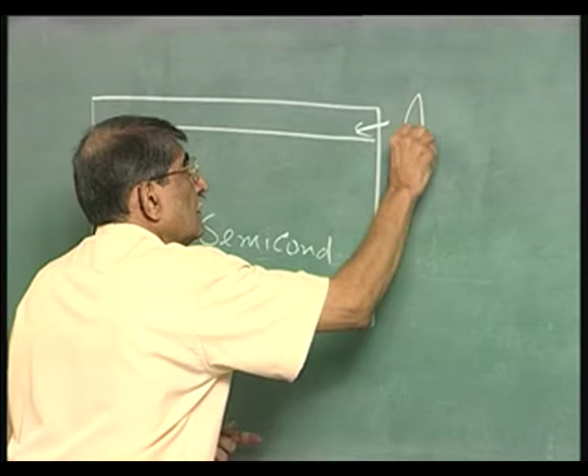Whether you talk of MOSFET, JFET, or bipolar transistor, the active layer is very thin. The rest of the layer, what does it do? It provides only mechanical support.

Now, in the process of providing mechanical support to that active layer, it does a lot of harmful things. The harmful things are some capacitances which come from the device to the substrate, and also the capacitance when you interconnect the devices, the routing capacitance, whatever you want to call it, with respect to the substrate, that also comes up.

So that is why, when you want to go to high speed, you want to cut down all capacitances. We have seen this right at the beginning. How do you cut down the capacitance? Replace this entire bottom layer by an insulating layer, so that the junction capacitance etc. can be reduced. We will see how it happens.

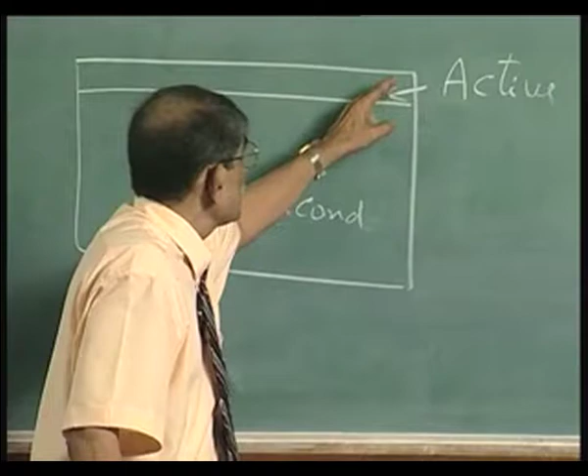Also, when you have a thick insulating layer, with an interconnecting wire going from one device to another, the capacitance of the layer with respect to the substrate can be reduced, because it can be made thick.

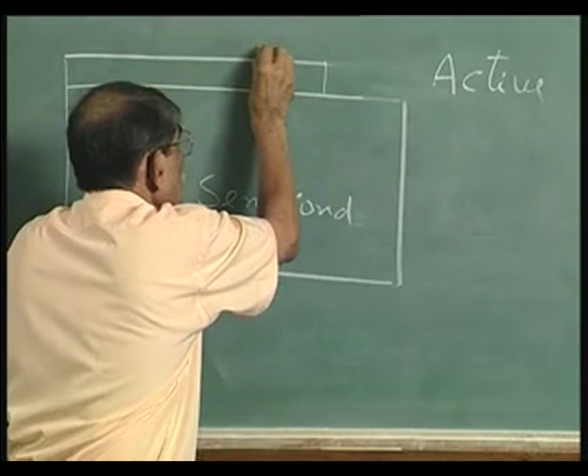For example, with respect to that, up to this point, if I remove this layer for the interconnecting layer, the interconnection goes through like this, that is the capacitance. With a thick layer, the capacitance is very small.

So this is one of the key things in high speed devices and high speed circuits made out of high speed devices. This is why people are looking more and more into substrates which are insulating. In the case of MOSFET, way back 20 years ago, people spent their energy on silicon.

Silicon on sapphire, for example. I think it is denoted as S, O, S. Sapphire is Al2O3, it is an insulator, a very costly material. But still, if you want high speed, this is what they have done in silicon technology, because high speed is not the proprietary domain of compound semiconductors. In silicon itself, people have been trying this: you have sapphire, and on that you grow silicon.

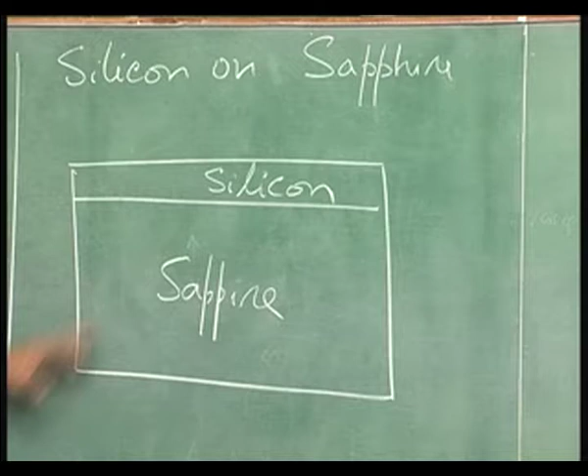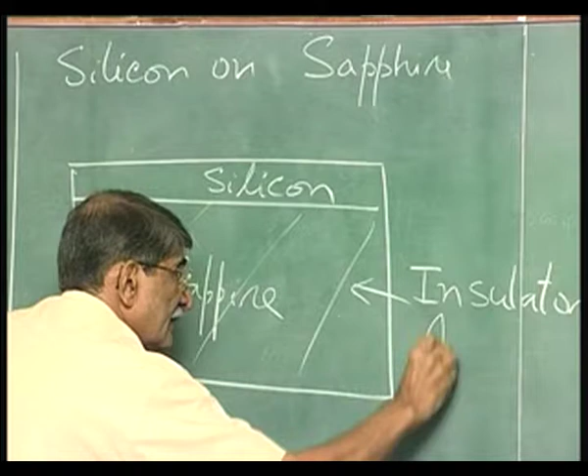This entire thing is an insulator, because it is Al2O3, an oxide. In fact, for defense applications, when high speeds are required, they were using that. Today also, for some very secret defense applications requiring high speed, they use this. But for other commercial mainstream ICs, they do not use it, because it turns out to be very expensive.

Instead, what they have done is not provide the whole thing as insulator. Within your technology, silicon can be put on an insulator, which is put on the silicon substrate. That is called SOI, silicon on insulator. We may have occasion to come back to that later, but today, since we are dealing with this, I just brought it out.

The substrate is insulator, because that is the mechanical support, and this is single crystal. On single crystal, you can grow single crystal. That is a nice thing. That is why you are looking for materials which are of high resistivity, or if possible insulator, which are single crystal. And not only that, the materials must allow you to grow the layer without any defects, meaning the layer you grow must have the same crystal orientation structure as this. Now, these are two different materials altogether.

Still, silicon matches lattice with sapphire when the sapphire has a particular orientation. So that is why they were able to manage, but still they were getting a lot of defects here. So thin layers were rather difficult, still they were able to manage, and get good performance.

You can get a 4-inch wafer. In fact, the person handling it - I have seen people handle it - they are so nervous because it is so expensive. You do not want to drop it, and you say 'I do not want to drop it,' and you will drop it. So, this is the key thing about that.

If you are prepared to spend that much money, and if you are not able to get as good performance as you look forward to, you can also switch to another material like gallium arsenide. With gallium arsenide, you can get a semi-insulating substrate. That is where we are telling - in gallium arsenide, the answer is you have a semi-insulating gallium arsenide. If you are making indium phosphide, a semi-insulating material, indium phosphide.

If you are using gallium nitride, you must look for an insulating substrate, maybe silicon carbide - you look for high resistivity materials like that. So, since we are focusing on this right now, let us focus on this material itself.

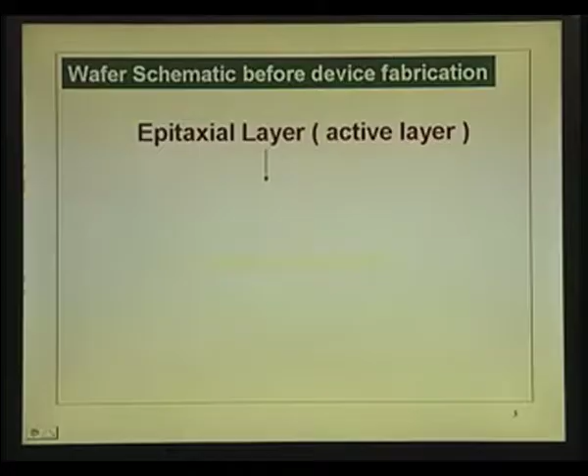So first you must be able to get this semi-insulating gallium arsenide material. Then you can think of putting the top layer on that, and this can be single crystal gallium arsenide, 100 oriented. On top of that you can grow nicely that particular layer, which builds up as time passes.

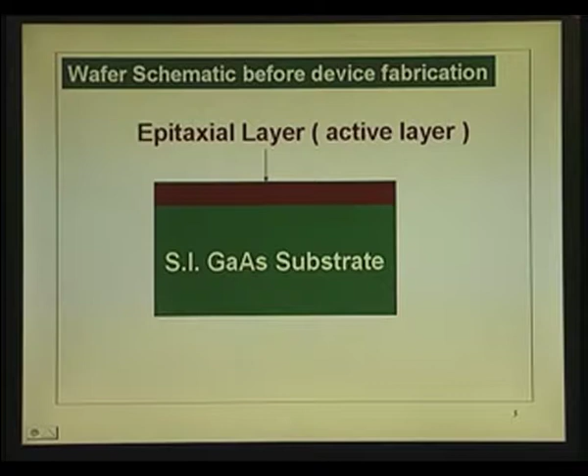That is epitaxial layer. Epitaxy means arranged upon. You arrange the atoms on top of a substrate, and the arrangement takes place exactly the same way as the arrangement of atoms in the substrate.

Now let us go into further details. First we will get into how to make this semi-insulating gallium arsenide. There are two approaches: one approach is chromium doped gallium arsenide. The other approach is in-situ compounded and EL2 doped gallium arsenide. EL2 is another impurity that comes in - you are not introducing it, it comes in when you grow.

What is the problem here? Why should you have chromium doped gallium arsenide? Can't you grow insulating gallium arsenide, undoped, with carrier concentration of 10 to the power 6, which is very, very high resistivity? Can't you get that? You can never get it, because there will be impurities present.

One of the major impurities present in gallium arsenide, which people were facing, was silicon. Silicon itself was coming from the crucible. And silicon, in gallium arsenide, is an n-type dopant. So when you grow by Czochralski technique, usually when you grow from a melt prepared from a polycrystalline gallium arsenide - first you prepare a polycrystalline material, then use it as a melt and pull the crystal - that turns out to be n-type because of the silicon. And you will say undoped gallium arsenide has carrier concentration of 10 to the power 15.

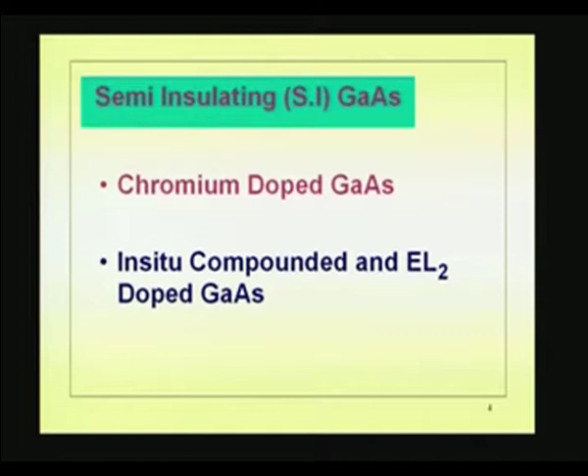Now, what is the thing? So what we said is, to get there, one route is chrome doped, or chromium doped, both are same.

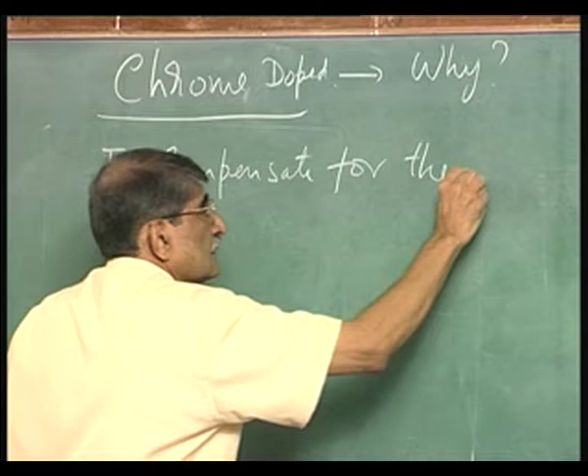This introduces a level to compensate for the shallow donors. Obviously, chromium introduces an acceptor level.

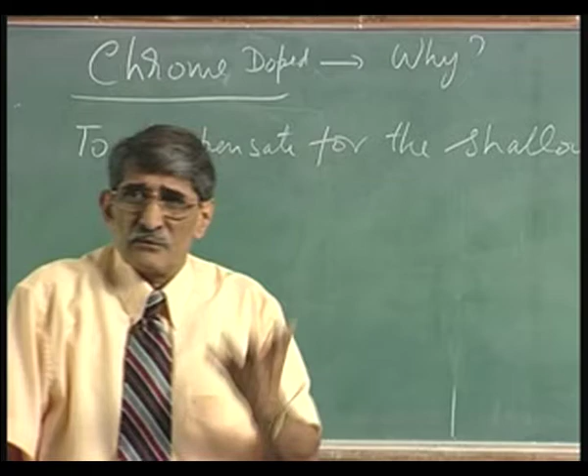Now, why should we put chromium? You can put zinc. Zinc is a p-type impurity. While growing gallium arsenide, silicon comes in unintentionally. You can add zinc, p-type. What is the problem? The problem is this: if compensation...

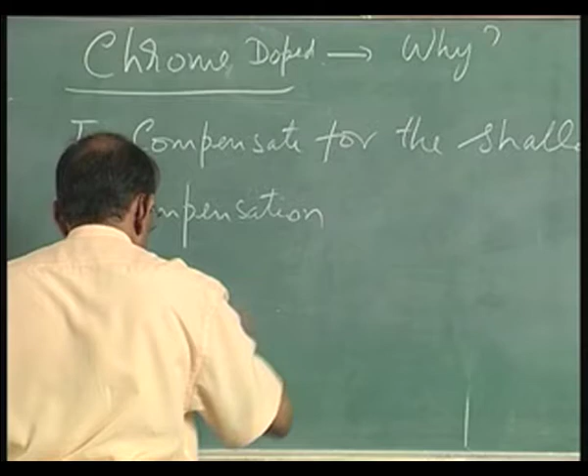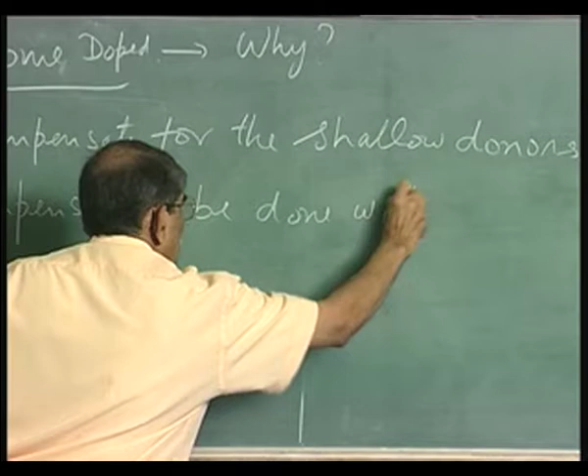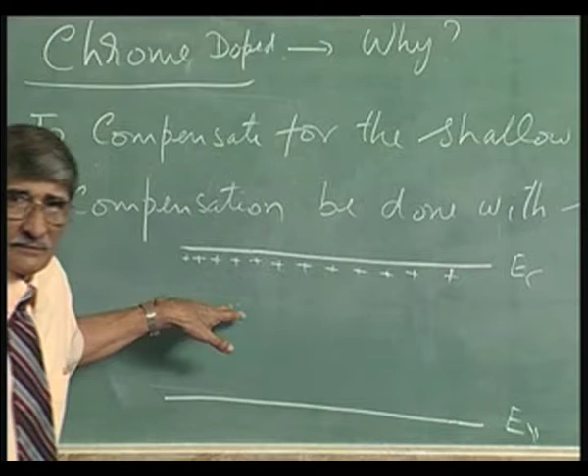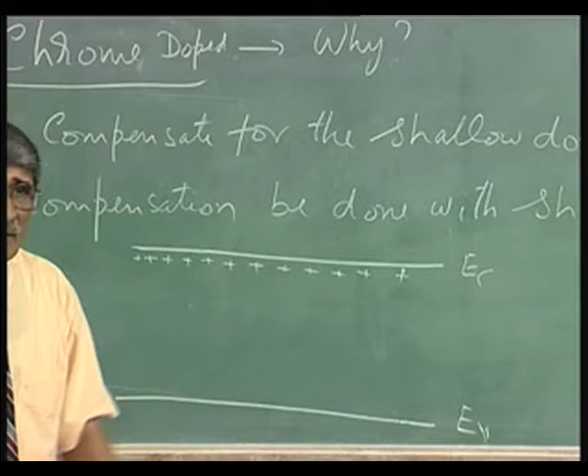Let us put it as, can compensation be done with shallow acceptors? What is the meaning of shallow acceptor? Shallow means shallow level. Let me draw the conduction band and valence band like this, EC and EV. You have unintentional silicon which comes up like this, a shallow donor, which makes the carrier concentration about 10 to the power 15, n-type. If that were absent, you would have got maybe 10 to the power 9 ohm centimeter resistivity. Now you get very low resistivity.

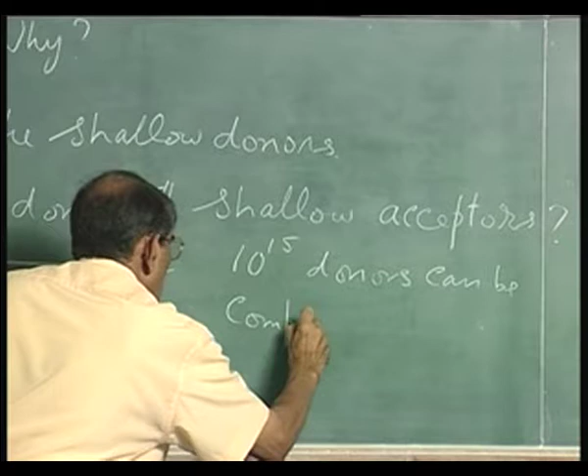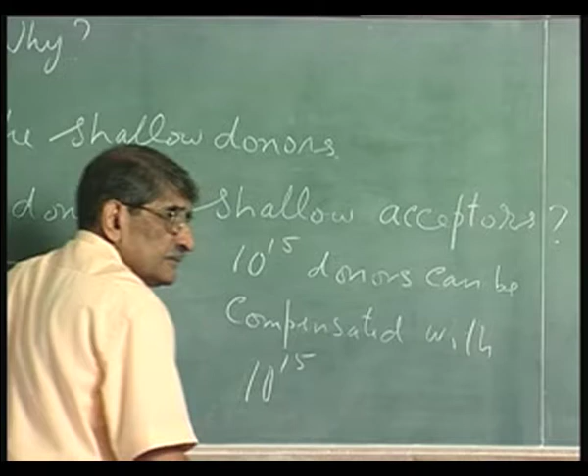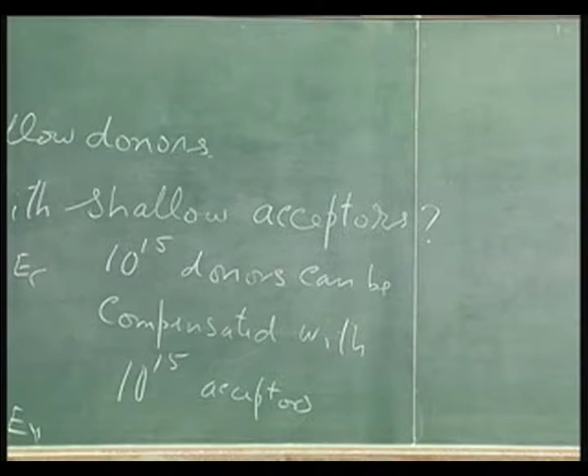Suppose I put acceptors here, that is the meaning of that. Shallow acceptor I put here, 10 to the power 15 donors can be compensated with what? Donors can be compensated with 10 to the power 15 per centimeter cubed of shallow acceptors, like this. Now, it is very difficult to control that 10 to the power 15.

Suppose it becomes 10% off here, you will say, okay, it is 1.1 into 10 to the power 15, so 10 to the power 15, that's fine. It is not all right. Because if it is 1.1 into 10 to the power 15, what happens? 10 to the power 14 p-type. So you can't compensate that way. So instead of going down to 10 to the power 6, you are at 10 to the power 14 p-type. What was n-type has become p-type. Very difficult, so control is difficult.

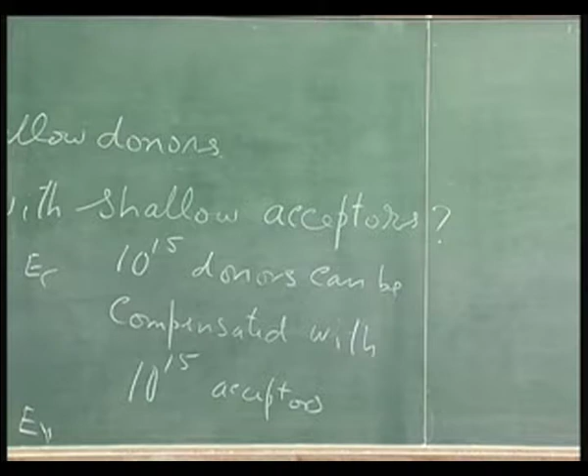Now let us see what chromium does. Chromium in gallium arsenide, of course, introduces a level here. I'm sorry, it introduces an acceptor level. You can call it a trap level. It is an acceptor level. This is ET, just to distinguish it from the conventional shallow donors and acceptors, I call it a trap level. It is actually a deep level. Deep level meaning lying deep from the conduction band or valence band. Please understand, deep level does not mean the impurity is lying deep. Deep level means, as far as the energy band is concerned, it is actually away from the conduction band or valence band, closer to the center of the forbidden gap.

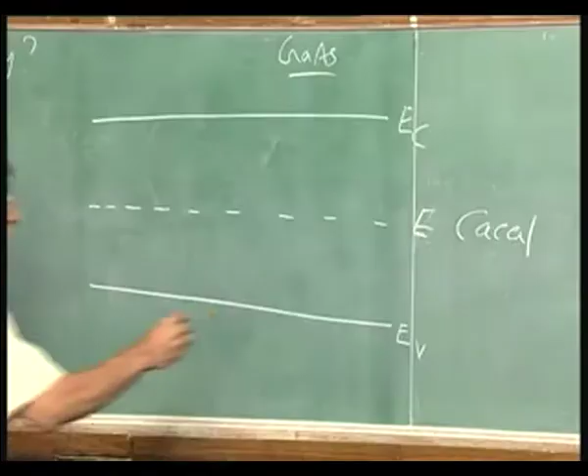So, acceptor ET, that is chromium, gives rise to this level. I think I should rewrite that.

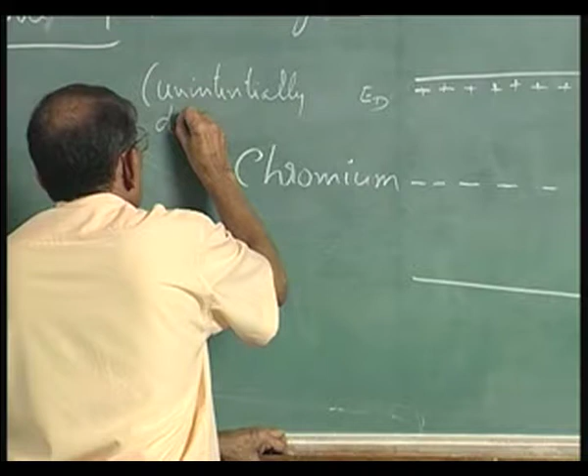Chromium level. Now you have unintentionally doped with silicon. Let us see how this works out. This is N-D, unintentionally doped, essentially doped with silicon, N-type.

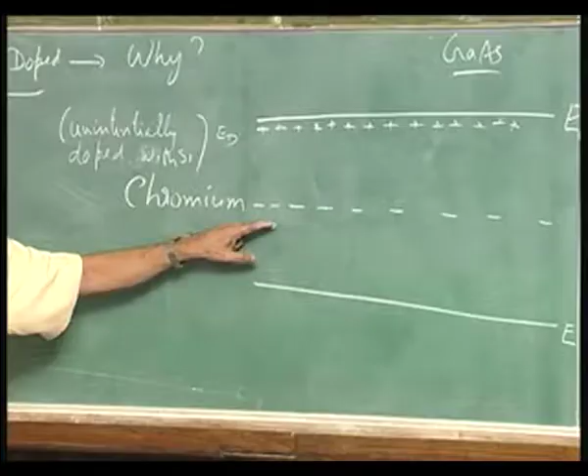Now let us see what happens. I start with no chromium, electron concentration is 10 to the power of 15. I start adding chromium, you are adding acceptors.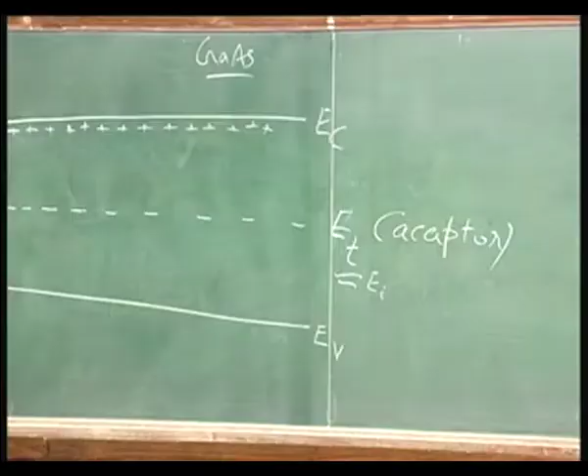When this was absent, where is the Fermi level in N-type material? Above the intrinsic level, this is almost equal to EI. ET in this case is almost equal to EI. In fact, you will see in the next slide that it introduces, behaves like a single acceptor trap level with ET at EC minus 0.714 electron volts, which is exactly at the mid gap of EG. The key thing is you have introduced an acceptor at the mid gap of the forbidden gap.

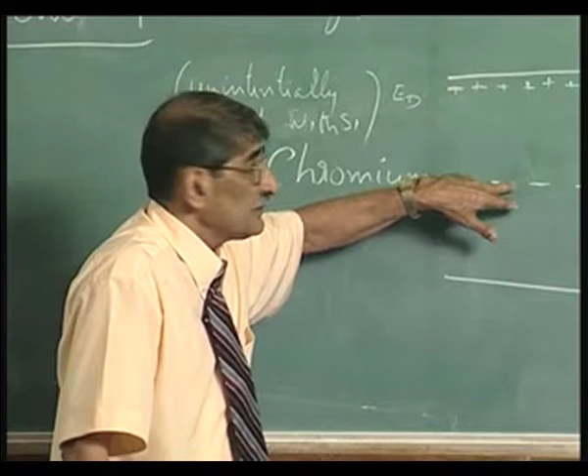So now we will see, as we go on adding chromium concentration from 10, 100, 1000, etc., you keep on increasing, what happens? Nothing will happen until you go to about 10 to the 13 or so. But once you reach that level, what is the status of this acceptor?

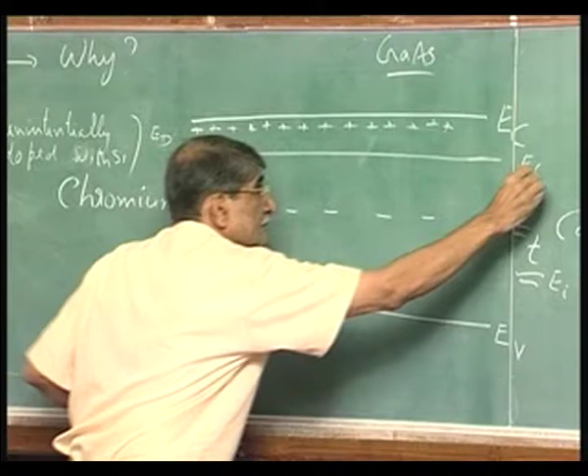If the Fermi level is here, all of you know the concept of Fermi level. That is N-type. As I keep on adding this, the Fermi level is below, Fermi level is above the acceptor level. The levels below that are mostly occupied, all the levels above that are mostly unoccupied. This unoccupied means it has given an electron, donated it, so that level is unoccupied. That is the meaning of that. It can go up or go down, whatever.

So if you add here, Fermi level is here initially, this is not occupied since electrons are donated, this is occupied. So if there are 10 to the power of 15 electrons here due to donors, when this is 10 to the power of 12, after those 10 to the power of 15, 10 to the power of 12 will go down here to occupy that. That is where it gets the electrons from, it is occupied. So conduction band electrons are 10 to the power 15 minus 10 to the power 12, approximately 10 to the power 15.

Keep on adding, as you keep on adding, it becomes more and more p-type, because you are adding a p-type impurity. So it becomes more and more p-type because the electron concentration comes down. Why does it come down? It has to satisfy this. These are ionized because that is below the Fermi level.

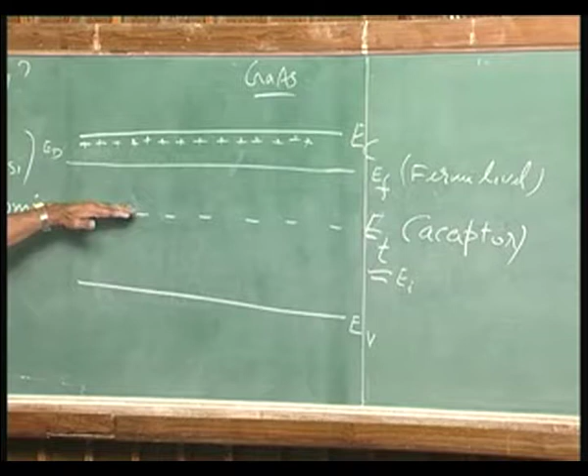It has to become p-type if all of them are getting ionized, but if the Fermi level comes down, if you add more, if it is ionized, it will become less n-type and more p-type, and if it becomes more p-type, the Fermi level will come below that. Now you can catch, if the Fermi level comes below that, what is the ionized state of this? It is not occupied. So what happens is the Fermi level will actually try to go down, but it cannot go down because then it becomes unionized. If it is not ionized, it is not becoming more p-type. So dynamically, as you keep on adding, when it reaches a certain level, the Fermi level gets stuck at the middle, it will not go below that.

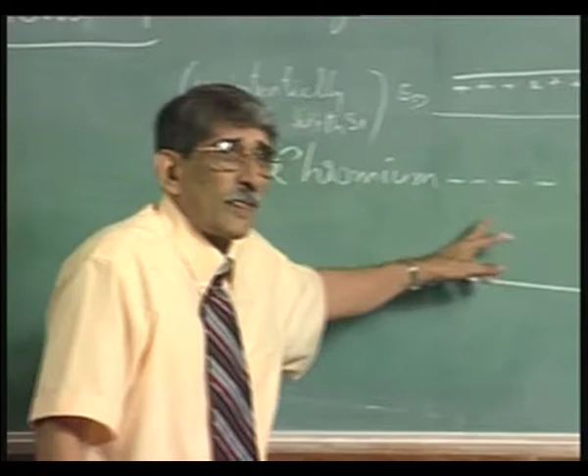So you can see the nice thing about this particular impurity at the center of the forbidden gap is it can precisely compensate for this 10 to the power 15. Once there are 10 to the power 15 ionized impurities, if you add more, those chromium atoms will not be ionized, and if it is not ionized, it is just lying there, that is all. It may affect the mobility. The maximum solid solubility of chromium in gallium arsenide is something like 1.6 into 10 to the power 17 per cubic centimeter, and in gallium arsenide it is 10 to the power 17 into 1.6.

So you will not have chromium contamination beyond that. You can completely compensate. That is why people are able to make use of this process.

When you grow from the melt, add a bit of chromium. The maximum solid solubility is that. Even if there is 10 to the power 17 chromium, which is the solid solubility at that temperature, how many will be ionized? The number ionized will correspond to whatever donor impurities are present, because by that time it becomes intrinsic. Once it is intrinsic, additional chromium is just lying there, probably getting into interstitial sites.

That is what only physically I could see, but from the point of view of ionization, etc., very clearly you see that happens. So whenever you want to compensate, you can compensate with an acceptor impurity.

In fact, about 30, 35 years back, in silicon they were using this trick. If you want a very high resistivity material, 10,000 ohm centimeter resistivity silicon, you have to sweat your guts out to get that material, because some impurity will be there giving it n type or p type. What they were doing was adding gold, sacrificing some gold, and gold can compensate, can act as an acceptor.

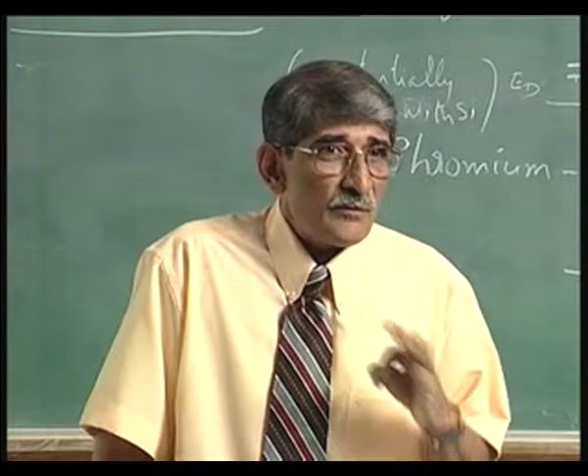People were struggling with that. Now today, if you want to buy 10,000 ohm centimeter resistivity silicon wafer, you must say uncompensated, so the vendor does not cheat you. You should say, I want uncompensated 10,000 ohm centimeter p type or n type resistivity material. Then he will grow a very pure crystal and give you undoped material.

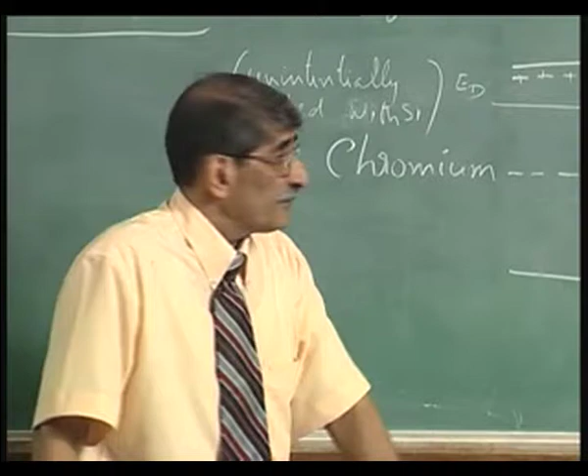So this is one way of getting semi-insulating gallium arsenide by chromium doping. The trick is: if I have shallow donor impurities, introduce an acceptor at the middle of the forbidden gap. Similarly, if you have a shallow acceptor impurity and want to compensate, introduce a donor impurity at the center of the forbidden gap. That will do the trick, and you will get very high resistivity, 10 to the power 9 ohm centimeter, which you can use as substrate.

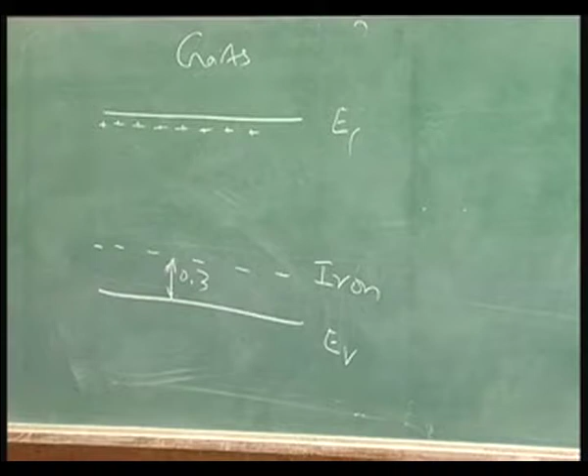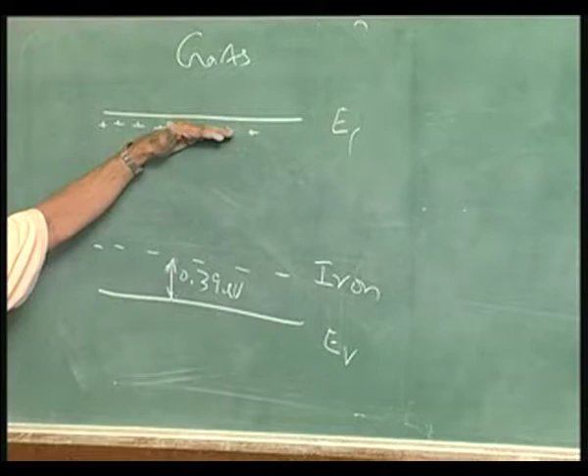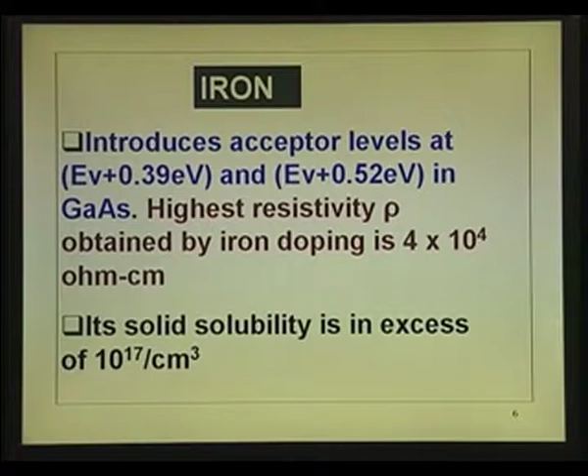Let us not ignore indium phosphide all the time, let us give it a chance here too. Dopants in indium phosphide, as I mentioned yesterday, you can make it n type, not by compensation, but by intentionally doping with sulfur or silicon. You can make it p type with zinc. Now, the purest ingots of indium phosphide exhibit n type conduction with 10 to the power 15 per centimeter cube, just like what you saw in gallium arsenide.

If you want semi-insulating indium phosphide, you can't use chrome. You cannot say chrome introduces a level at the center of the forbidden gap for all materials - it does so for gallium arsenide. For indium phosphide, iron introduces an acceptor level at the mid gap. So you can get semi-insulating indium phosphide by doping with iron.

You can be sure that if you do not take care with the usual crucibles you use - silica crucibles - that will introduce silicon doping from the crucible itself. That is why comfortably they use compensation like that.

Now let us take a look at this other doping thing for gallium arsenide. What we said is, you get n-type gallium arsenide with conventional doping - you melt polycrystalline gallium arsenide, then grow, and you get n-type. That you can compensate with a chromium acceptor level.

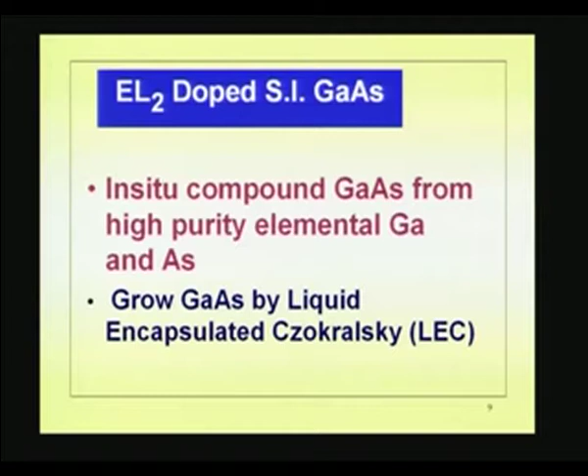I will not go into chromium doping now, because once you have the crystal from a polycrystalline material, you add chromium to the melt, which is rather simple. Here, this EL2 doped semi-insulating gallium arsenide is very popular today, because if you can get semi-insulating material without intentionally adding materials like chromium, that is a technology.

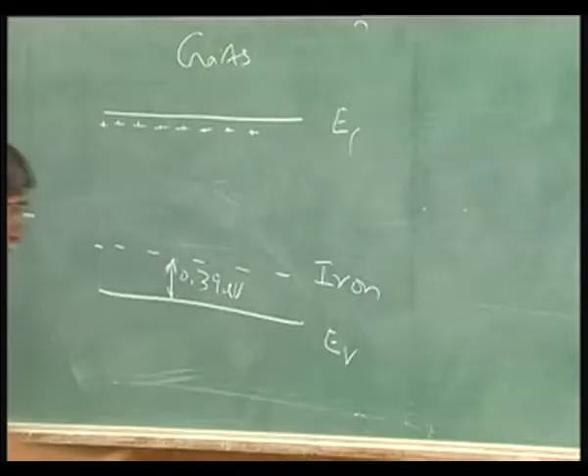Why? If you have a substrate which is chromium doped, if I have chromium doped gallium arsenide which is semi-insulating, on that you grow an active layer.

You do it at higher temperature afterwards. This substrate has chromium. You want to grow the active layer, n type, at a doping of 10 to the power of 14, 15, 16. Now, when you grow that at higher temperature and do any processing, that chromium gets inside into that layer. All these deep impurities which are added deliberately can diffuse and get into this layer. Once it gets in, the properties of the layer you are growing change. That was one of the major problems people had when making gallium arsenide devices in the 1980s, but after that the problem has been sorted out without adding chromium.

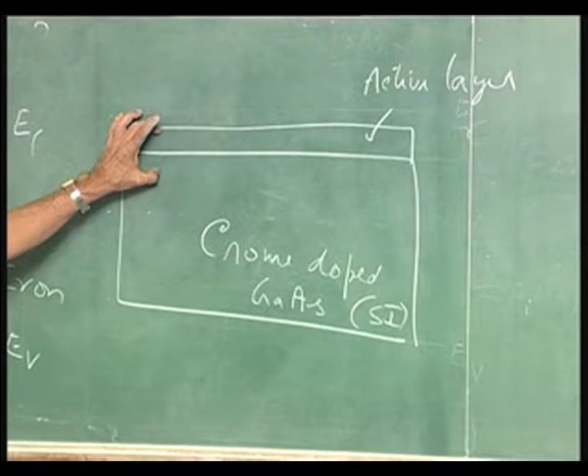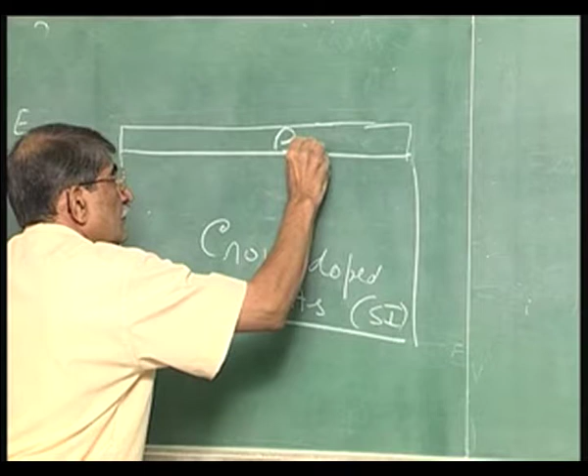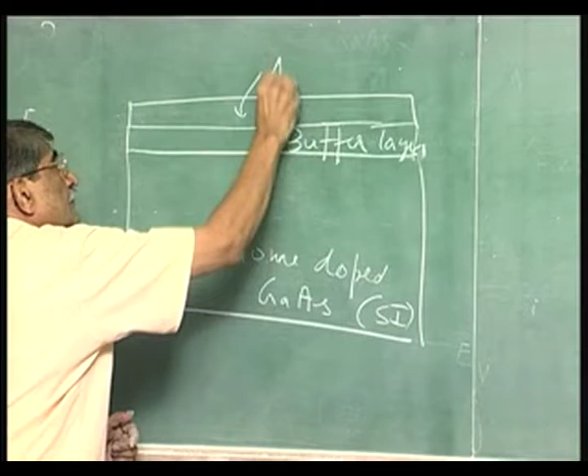So in that case, what they were doing was not putting the active layer right on the substrate. Instead, they put a buffer layer, and on top of that you grow your active layer. That is what they were doing. So in publications, when you see a buffer layer, that is mainly because the substrate is chromium doped. When you use a semi-insulating substrate where you have not added deliberate impurities like chromium, you do not need buffer layers. You can straight away grow other layers.

Let us go back into this now. The approach, we understand what is needed. We need gallium arsenide made by pure mixing of pure gallium and arsenic. So, place high purity gallium, 6-9 purity, and high purity arsenic in a heated graphite crucible coated with pyrolytic boron nitride. This takes care of silicon contamination and other contaminants from the graphite crucible, which is prevented by using this boron nitride coating.

Then you put it in a crucible. I have to show you the picture so it is visible, so you can see exactly what happens. This is the crucible, pyrolytic boron nitride coated, with arsenic and gallium. You put them together, with gallium placed above the arsenic. Why is gallium above? Because arsenic is solid while gallium is liquid, even at 29.5 degrees centigrade. That is why you put it on top.

On top of that, you put boric oxide, B2O3, which acts as a cap that you provide. It will melt at about 450 degrees centigrade. So what you do is put this disc of B2O3, which has undergone baking etc., on top of it, and then heat it.

Let us go back to that. So, place the B2O3 disc above the gallium and arsenic stoichiometric mixture, 50% by weight gallium and 50% arsenic. You put this cap on top, and here you see it as a disc, not yet melted. The whole system is enclosed, and you have to pressurize it to about 3 atmospheres. That is where the catch is: you must have crystal growing systems which can reach those high pressures, 3 atmospheres of nitrogen.

You don't need excess arsenic; the nitrogen pressure prevents the loss of arsenic as you heat up. So you heat to about 450 degrees centigrade. At 450, the B2O3 melts and floats over the gallium and arsenic. You choose B2O3 because it should not react with the gallium arsenide, and it should be lighter so it floats rather than sinking to the bottom. So it is a well thought out cap, not an ordinary one, which melts and floats on the gallium arsenide to prevent any loss of arsenic when you pressurize from the top.

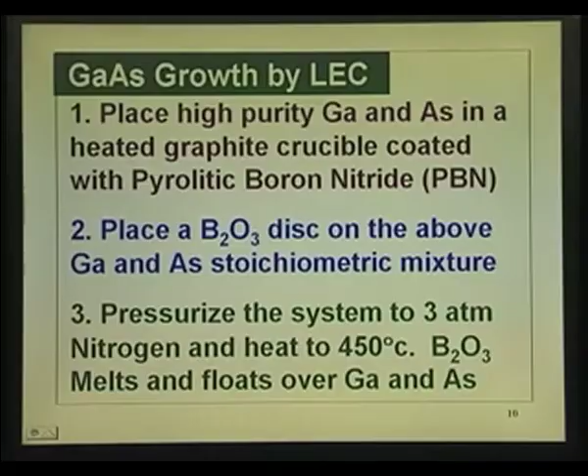Let me come back to this. Once it melts, at 450 degree centigrade, arsenic and gallium have not reacted yet. All you have done is melted the B2O3, which protects with 3 atmosphere pressure. Now you want to jack up the pressure to a higher level where gallium and arsenic will react, so raise the pressure to 60 atmospheres.

That chamber can withstand it, that was the catch earlier. Now you have crystal pullers which can withstand those temperatures, and then heat the crucible to 700 degree centigrade. Reaction of gallium and arsenic occurs to form gallium arsenide. Once it has melted, you have the compound gallium arsenide formed at lower temperature.

Now you do not need the 60 atmosphere, and this is important to note. The vapor pressure of arsenic over arsenic itself, if you go to 1200 degree centigrade, is 60 atmosphere, that is why you use 60 atmosphere there. But once you have gallium arsenide, if you heat it to its melting point, the vapor pressure of arsenic over gallium arsenide is only 1 atmosphere. That is the nice thing - vapor pressure of arsenic over arsenic itself is 60 atmospheres at that temperature, but over gallium arsenide it is very low.

So once the compound is formed, reduce the pressure to 2 atmospheres, which is sufficient to prevent loss of arsenic with the cap of B2O3. Increase the crucible temperature to 1238, that is the melting point - 1234 plus 4, melting point of gallium arsenide.

Today you can grow 3-inch to 4-inch rods of gallium arsenide, meaning you can have wafers of 3-inch, 4-inch diameter comfortably, which are semi-insulating. You can see throughout this B2O3 is the protector, lighter than gallium arsenide, lower density, therefore it forms a cap all through, and you may get a coating of that on the wafer crystal as you pull it. This is called the LEC technique, liquid encapsulated Czochralski.

Now this is just for fun, I put it in - this is the crystal puller, this portion here is the crucible, this is the melt, and this is the crystal being pulled. You can see it is rotated and pulled - rotation and pull speed govern your diameter.

This is where the crystal grower views how it is growing, whether it's going alright, whether there's any twinning or twisting taking place. This should all be done on a vibration-free table, because the slightest tap will give twins, defects in the crystal.

That is actually the growing of the crystal from the gallium arsenide melt, and the system should withstand that high pressure. You can see this is the heater, it can be resistive heating or RF heating, either way you can use it.

Now, EL2 doping of gallium arsenide comes into the picture. I have already mentioned that gallium arsenide is p-type when grown like this, if EL2 is not present - about 10 to the power 14 to 10 to the power 15 per centimeter cube. This is due to contamination from boron from the B2O3, which tends to make it p-type, and also carbon incorporation from the crucible to some extent.

These two things make it p-type gallium arsenide, but that shallow dopant can be compensated by the native defect, which is due to arsenic occupying the gallium site. This is put here in black and white, or in color - the gallium site, arsenic occupying gallium site, it is sometimes written like this: wherever arsenic gallium is supposed to be, it has pushed the gallium and arsenic is sitting there. That is the idea.

That is the symbol used for anti-site, and it gives a donor level at EC minus ET equal to 0.75, which is almost close to the center of the forbidden gap. So that is where we have got LEC gallium arsenide.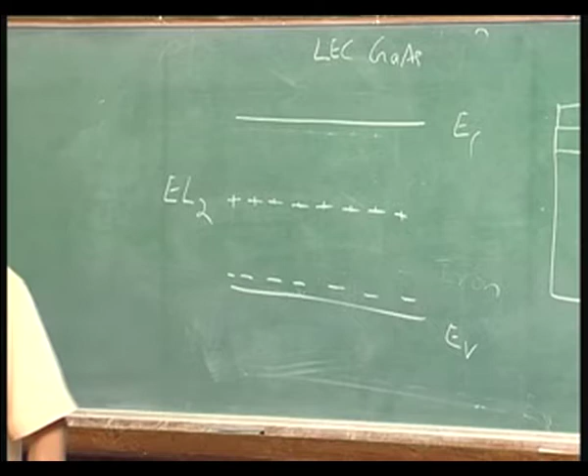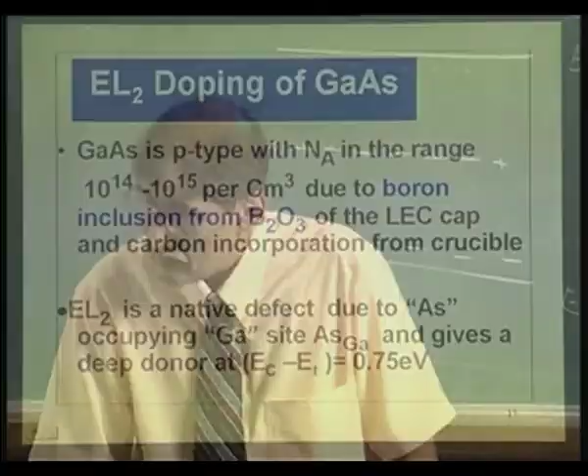It does not have the donor, it has the acceptor, and then you get the EL2 center, which is an antisite defect. This is the result of a defect which you normally may not like, but you like it here. You do not have to worry about this particular defect moving into the next layer - it is not like an impurity which will run. So it does not move unless you go to the liquid melting point of the gallium arsenide. EL2 is due to arsenic overpressure.

Growth from the melt with arsenic concentration greater than 0.475 gives excess arsenic in the solid. Even if you do not grow from the stoichiometric melt, even if it is slightly less arsenic, not 0.5 but slightly less like 0.475, when you freeze it and pull it, it has excess arsenic that sits in the gallium site. People have found that you can get 10 to the power 9 ohm centimeter resistivity if you have the stoichiometry at or slightly below that.

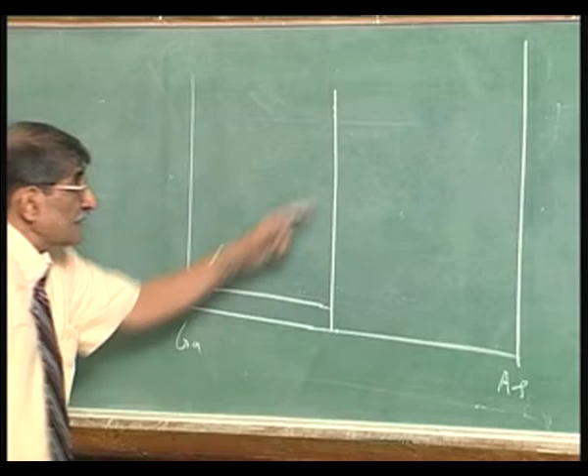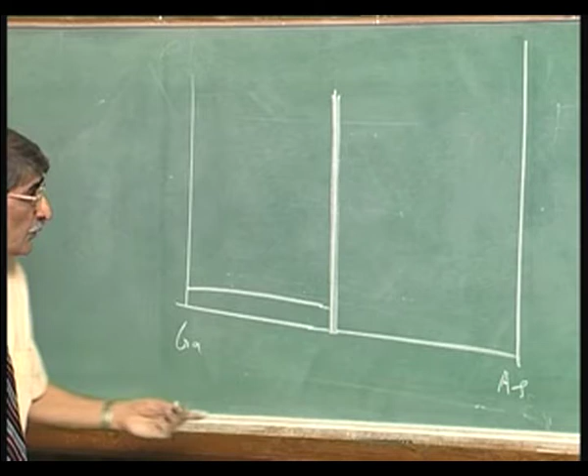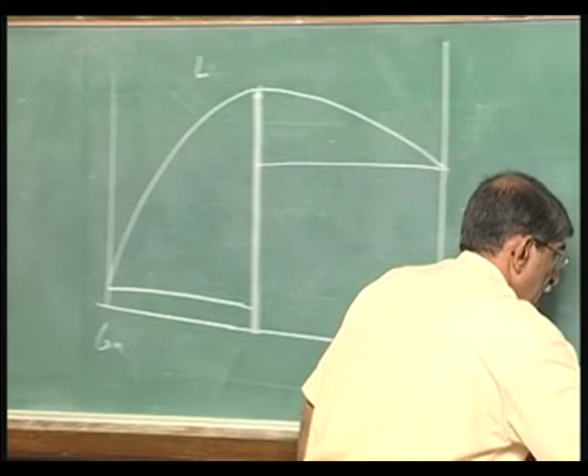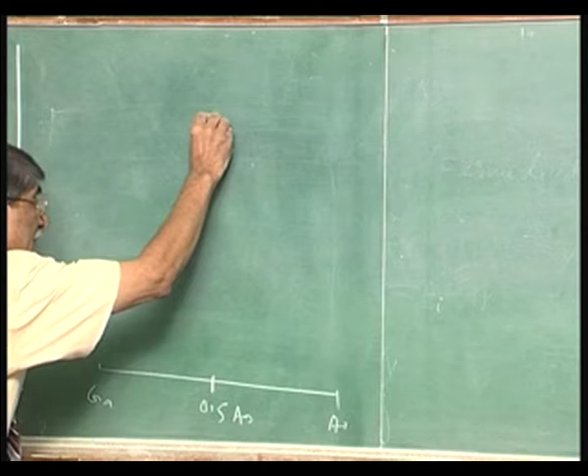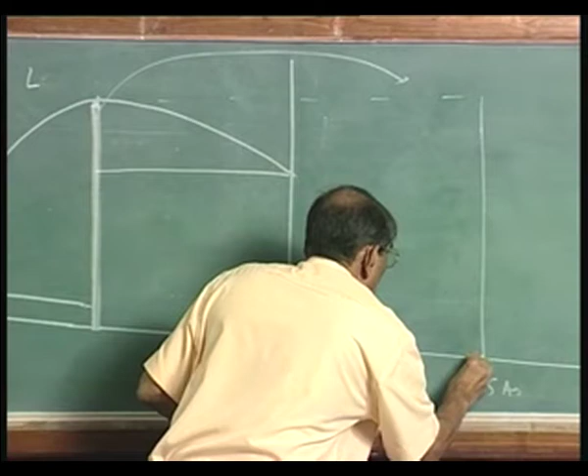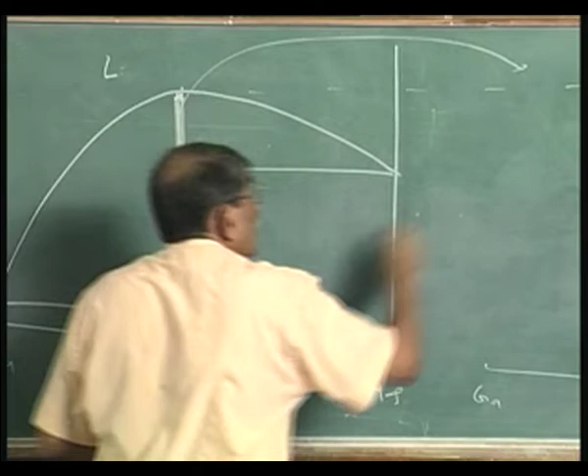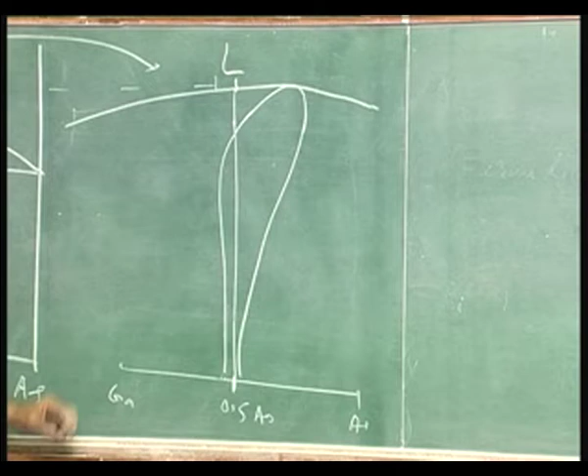Now, if I draw a line like this, and expand this line alone - I import only this portion - then what you saw yesterday was something like this. I am not able to draw it very neatly, but this is the expanded view, and on top of that you have the liquid. Now you can see when I freeze from here or here, the solid that freezes - where does it go? It goes into this. If I freeze from here, which is less than 0.5, say 0.475, the freezing solid is - this is liquid plus solid, this is liquid plus solid, so solid will be there. The freezing solid has that composition. That is the meaning of the phase diagram.

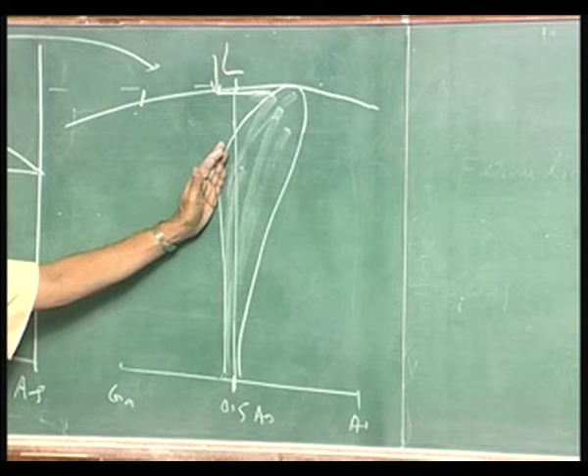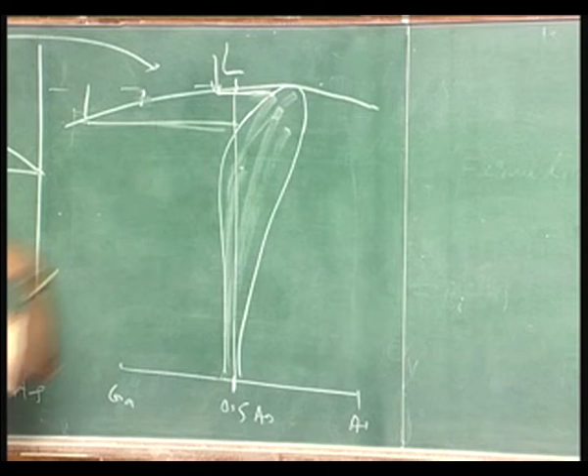So if I have the composition corresponding to this here, that is arsenic rich, slightly arsenic rich. So you have excess arsenic and also gallium vacancies. Those excess arsenic atoms go and sit in the gallium site, which is the anti-site, and that actually becomes beneficial to compensate for those carbon or boron impurities. If I go onto this side, all the time you will get this, but if I go onto that side, you may not have these anti-site defects, because if I come down from here it may come here, just about stoichiometric - the melt. The melt is actually not non-stoichiometric, but the composition you get is arsenic rich. That is what you are looking for. So that is why you get high resistivity materials when it is more than 0.475 arsenic.

So, to sum up, what you can get now is semi-insulating gallium arsenide material with this technique, with the help of the EL2 center. You do not have to do chrome doping. This is the material used these days for making integrated circuits as the starting material. We will continue on this tomorrow, because next we will see the top layer on this epitaxy layer - that part we will discuss next.